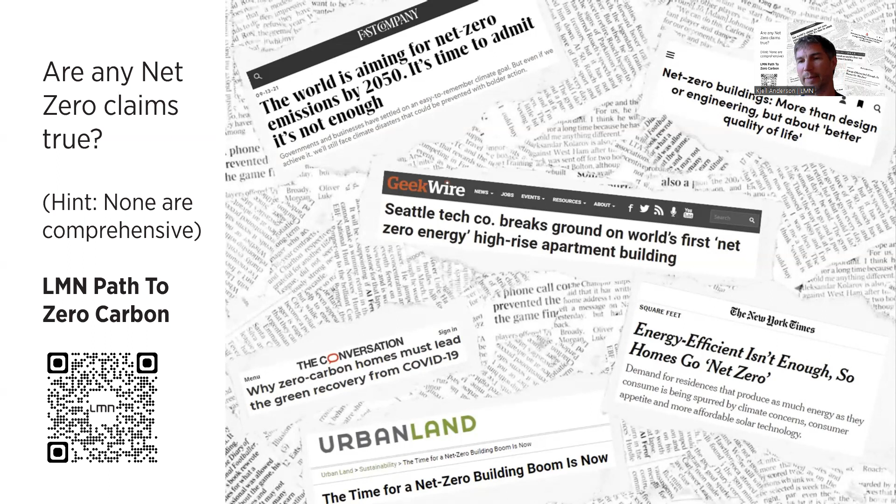In order to determine how we at LMN are approaching carbon neutrality and update our path to our sustainable action plan, we researched and created this Path to Zero Carbon series, a fail-forward, free collaboration with dozens of industry leaders to get to zero in every carbon emission source in the built environment.

Let's talk about carbon offsets first. Emissions cause damage, so some entities have come up with a way to estimate the cost of damages to others. In theory, we should pay for people moving off islands that will be underwater because of our emissions, for damages caused by disasters, such as hurricanes, that are exacerbated by climate change, for crop failures due to climate change, etc.

We've had 23 disasters in the US this year alone, worth over $1 billion. But we currently don't pay anything for carbon, at least directly. On the right, you see what we pay for voluntary carbon offsets, as low as $2 a ton, which are often used for carbon neutrality claims in buildings. And the actual cost of removing carbon from the atmosphere is $200 a ton or more.

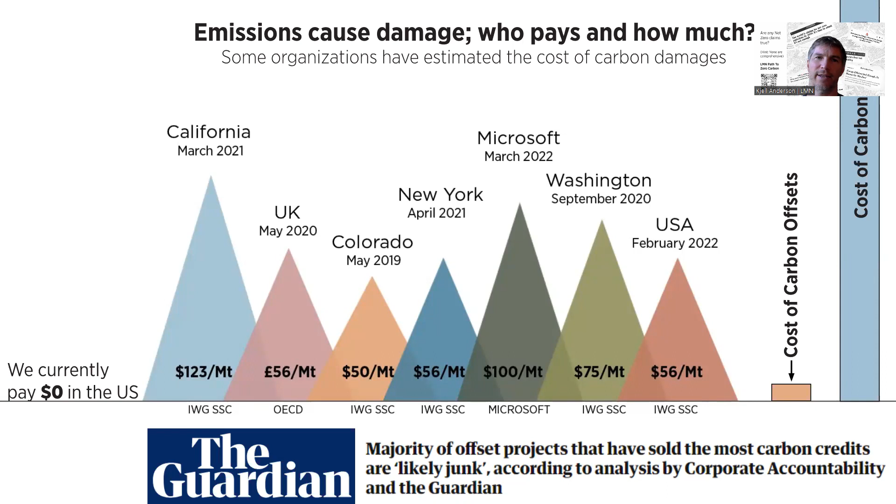And several studies show that most carbon offsets don't live up to the promises that they make. The reference study suggests that a majority of offsets reviewed are likely junk. Whether they are junk or not, they trick us into thinking we've already made carbon neutral projects that have avoided doing the hard work of actually reducing our own emissions across every source in the building sector. This is critical work, and offsets are a distraction.

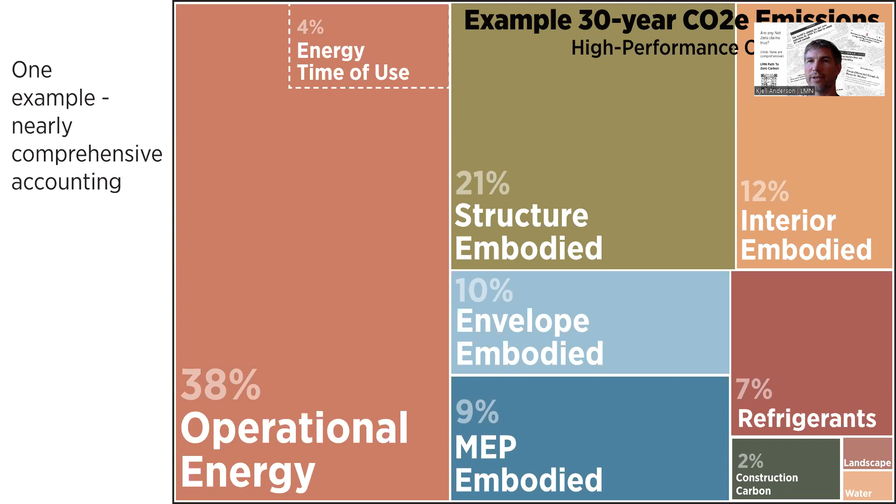So this is a more comprehensive carbon accounting for an office building in a moderately low carbon electricity grid. You can see that operational carbon is still a significant portion at 38% of emissions, and of these, a certain amount is the delta between annualized emissions and time of use emissions. Structure, envelope, MEP embodied carbon, interiors, refrigerants, and others are included, but transportation and energy generation systems are excluded from this particular study.

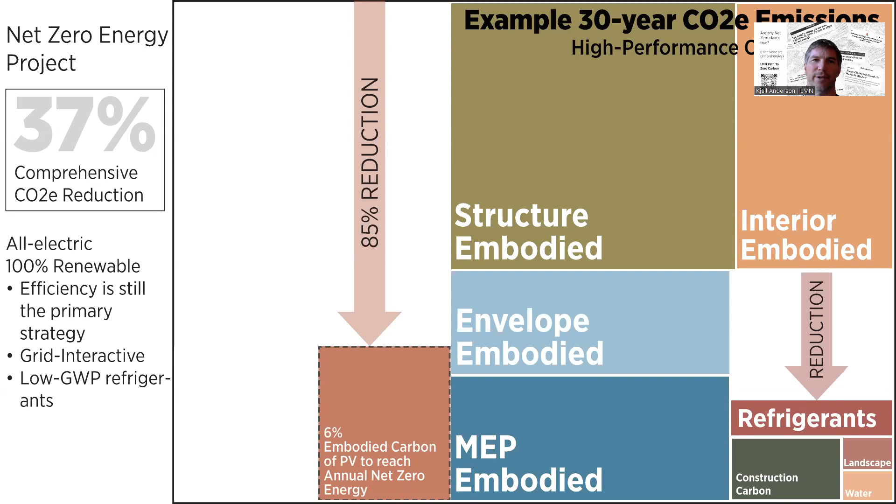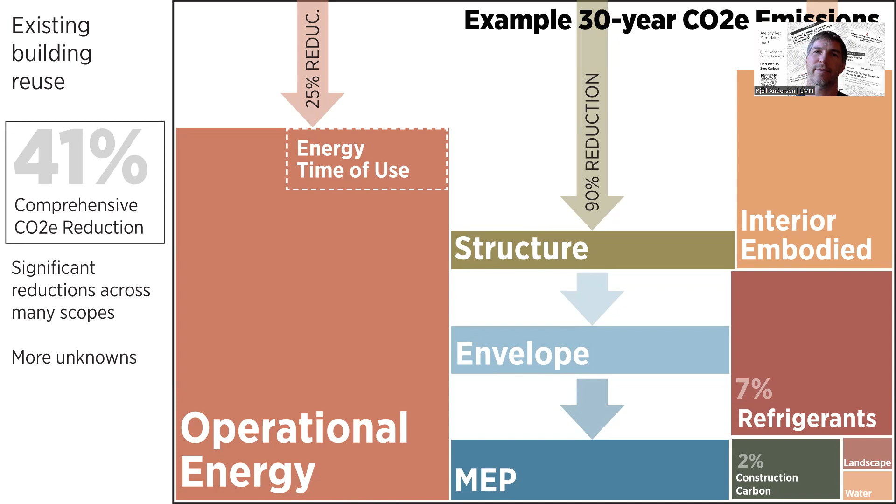Now this building is a reuse with modest energy savings. We significantly reduce structural emissions as well as envelope and MEP and some interiors, a 40% total reduction. Not zero carbon, but well along the way. How about a net zero building that is actually a building reuse? Well, in this case, we approximate about a 70% reduction.

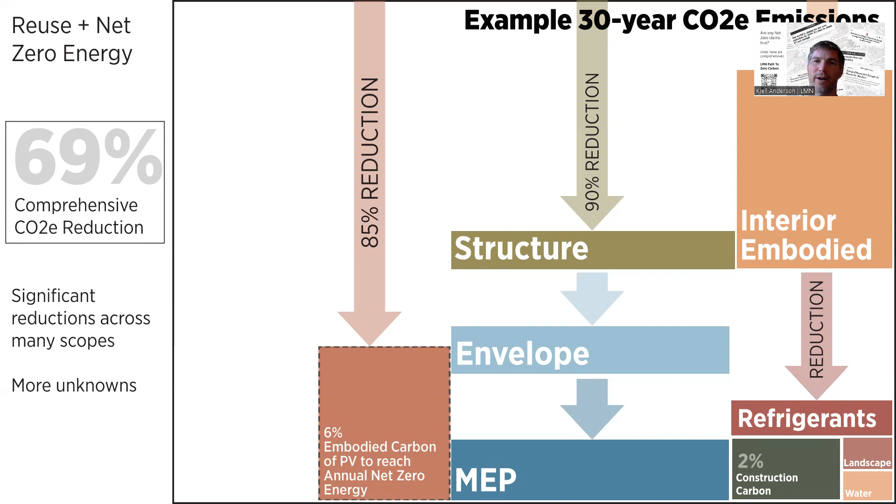The trick with all of this is that if we don't use offsets, we need to get to zero, or close to zero, in each of these areas. Work with manufacturers to get MEP embodied carbon to zero, work with a circular economy to get interiors to zero, work on systems that use very low or zero carbon refrigerants, etc. It undervalues all of our efforts when someone prematurely claims they've reached carbon neutrality.

So while I have you here, as an architect, I believe we can work together more productively. The goal that I have is to trade off improved envelope performance for reduced size and cost of mechanical systems, which also reduces energy use. The top graph on the right shows current practice, with most teams sometimes seeing such savings where you can trade off envelope for reduced mechanical size and cost.

But the bottom right shows that if we had better early cost and energy modeling and better communication, most practitioners believe we would often or always get those kinds of savings, which are cost neutral and reduce embodied carbon of mechanical systems as well. We should be good at this by now, but we're not yet there.

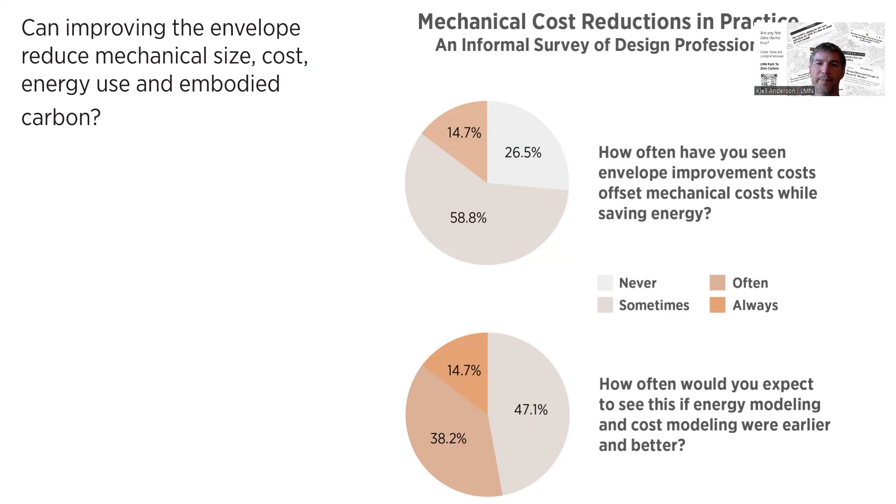So in sum, there are no carbon neutral buildings yet, but there are a lot of claims. To be honest, we need to calculate a comprehensive carbon footprint, and we can begin trading off improvements in one area against increases in another area to make carbon smart decisions. We need to calculate and communicate carbon comprehensively.

If anybody has any comments on this series, please send them to me because we can update it at any time.